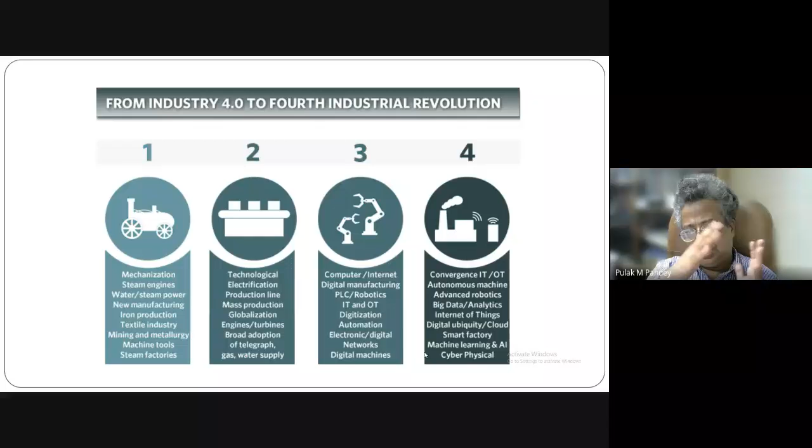The first industrial revolution was about mechanization. Mechanization means when the primitive machines which were there at that time, because this industrial revolution took place at the end of the 18th century, were used. If you have a machine, I'll say that a simple lever is also a machine. Now until you energize a machine, you cannot take work from it.

So from where did they get that energy? At that time, in order to drive or take work from those primitive machines, it was human muscular energy or cattle that were employed to drive those machines.

Then people kept on doing innovations. They developed some very primitive water turbines and derived energy from the flowing river. All those kinds of things people were trying. Materials were also developed at that time, and it was the time when iron ore was processed in a very nice manner, and people started developing steels, bringing a very nice, strong, tough material to society.

All these things together actually brought the first industrial revolution, but the key word here is mechanization, which took place because James Watt developed the steam engine. The steam engine development brought the first industrial revolution because all these primitive machines, improved due to development of iron, steel, mining and metallurgy technologies, were energized by steam power, and the human muscular energy or cattle-based systems were replaced by steam or water power.

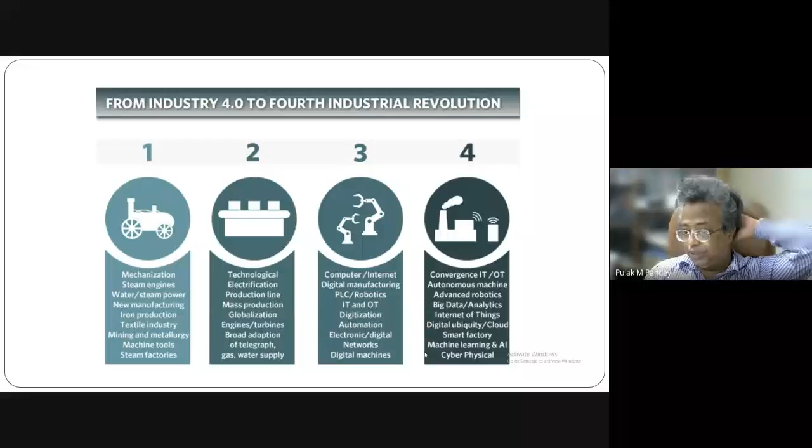All these things brought some sort of automation, so programmable logic controllers were developed. They brought automation in manufacturing, and bringing automation by controlling machines or machine tools with the aid of numerical control or microprocessors is termed Industry 3, or the third industrial revolution. This third industrial revolution is basically the substitution of human mental effort. In the first industrial revolution, human muscular energy was replaced by steam or water power, and in the third industrial revolution, it was mental effort that was substituted by the microprocessor, or numerical control, by bringing numerical control to manufacturing.

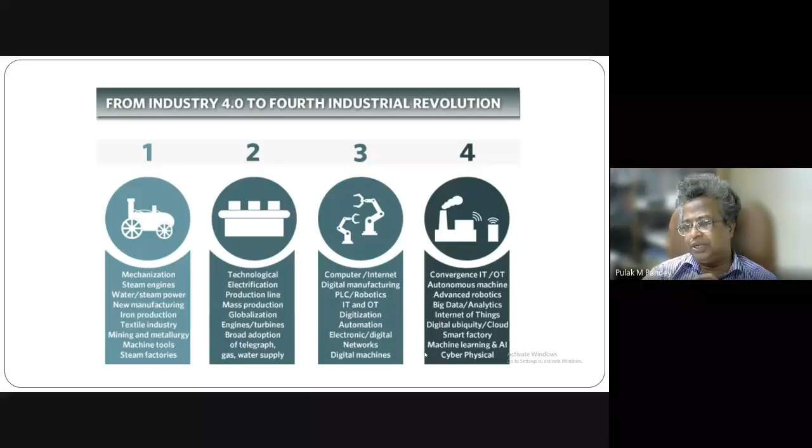Today we are talking about smart manufacturing, that is Industry 4.0, which is basically due to the convergence of information technology, wireless communication technology, and other related tools like big data analytics, Internet of Things, Internet of Services, cloud, smart factory, machine learning, and AI. All these constitute a cyber physical system. When manufacturing technology is enabled or assisted by information technology along with wireless communication technology to improve the manufacturing scenario, it is called Industry 4.0 or smart manufacturing. This is the most advanced concept we talk about today.

At the core, at the heart of the cyber physical system, we have huge digital information. Over the years, so many engineers and researchers have developed a lot of data, and if that data is made available in digital form - like you can visualize there are machining handbooks, handbooks related to additive manufacturing, grinding, casting technology - this is information, but it's not digital information. So this information has to be made available as digital information, and it should be present in the cloud.

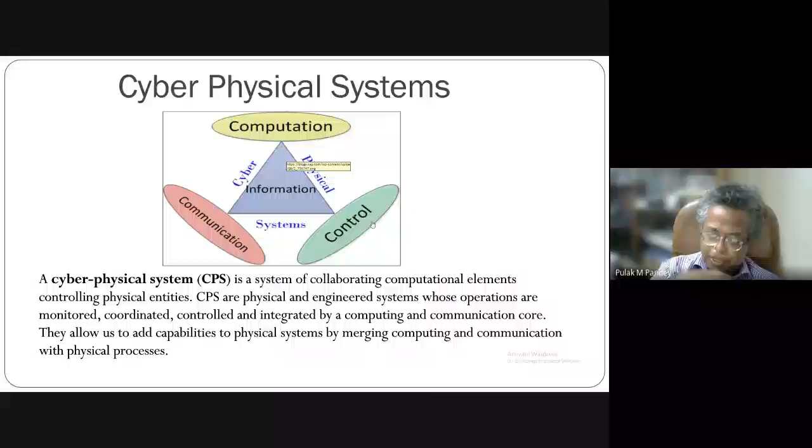Now, this schematic diagram just gives you a feel, but to actually achieve it, there are several technologies involved which are not only related to mechanical engineering, but also to electronics, information technology, computer science, mathematics, and many other branches of engineering together. So I'll show you those things in my forthcoming slides.

Now you might have also seen that if there are more models of a particular vehicle, like if you go to company A, it has car A1, A2, A3, A4, number of models, the way you have number of models for say Maruti car, you will find that there are different assembly lines dedicated to different models. You will hardly get a situation where two or three kinds of models of a car can be assembled or produced on a particular assembly line.

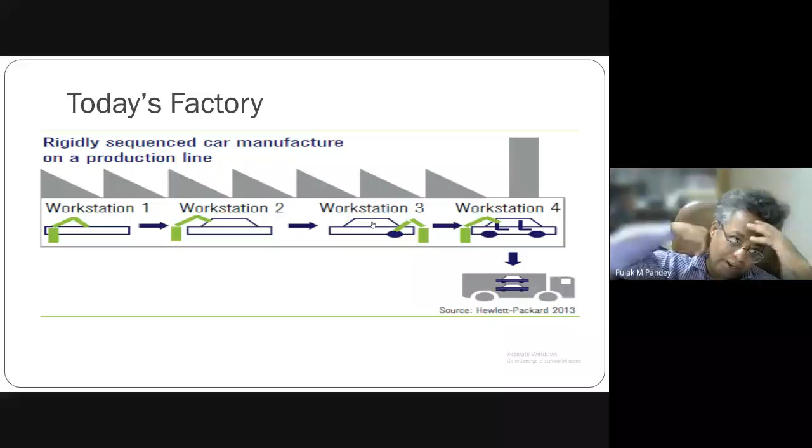So what you see is that it is a rigidly sequenced car manufacturing on a production line. Though this is a very nice way of manufacturing which actually emerged at the Industrial Revolution 2 time, and is also ongoing today with enhanced capabilities, still it has a limitation: it is rigidly sequenced and not flexible to the various variants of that car. So this is what today's production system is.

But what we are talking about in smart manufacturing is that this entire thing will be driven through data which is communicated to various workstations, which may be present at different premises in a company, or maybe at different locations physically, and they are all communicated the data through which they will operate. And these workstations also have capability - they are enabled with Industry 4.0 modules so that they can communicate with each other or one another.

And that's how you are able to achieve a fully decoupled, fully flexible, and highly integrated manufacturing system, which today we are calling smart manufacturing. So if you have this kind of manufacturing system, you will be able to handle different kinds of products - or more precisely, different models of a particular car can be done on this kind of integrated manufacturing system.

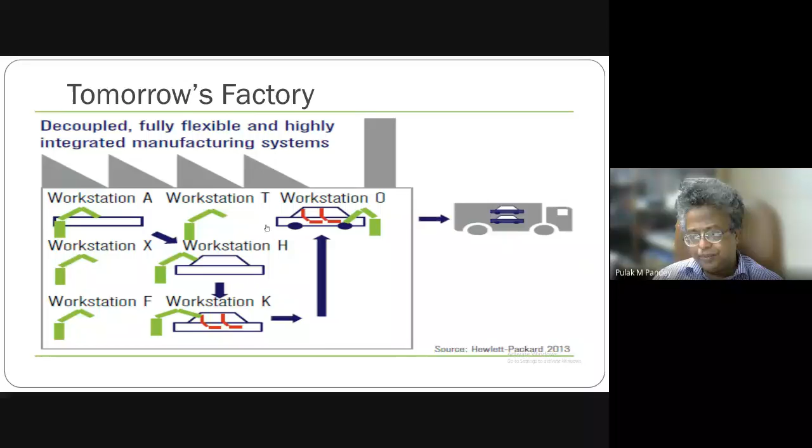There I could see that they are definitely able to modify this concept of today's factory. They are a little ahead, but have not reached up to this kind of concept. What they are able to do is, in one assembly line, they are able to assemble or produce more than one kind of car, provided there is a lot of similarity. So they have introduced some degree of flexibility in their assembly lines - they have moved forward towards bringing more flexibility in their production line, and they are not very rigid in their case.

So there are 6 typical design principles which you have to think about. One is called interoperability. Now this interoperability means the ability of cyber physical systems...

They are like workpiece carriers, assembly stations, and products. Humans and smart factories connect and communicate with each other via Internet of Things and Internet of Services. So this kind of property or capability, if you introduce in your manufacturing system, this is called interoperability. Then virtualization means this concept, like virtual simulation, virtual reality.

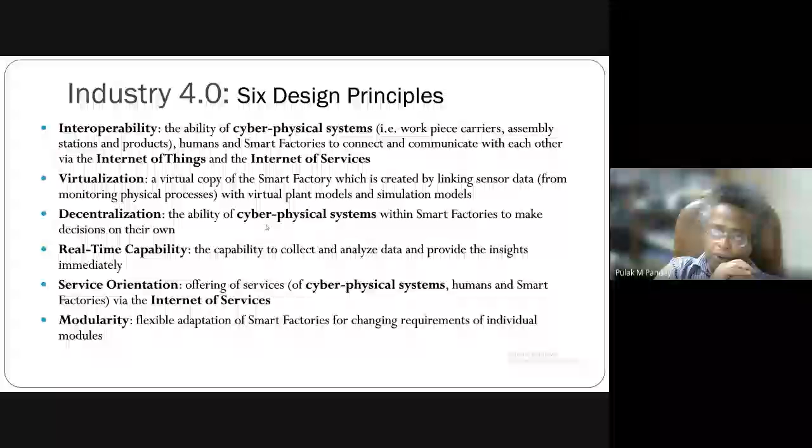So these smart assemblies, your smart components, can be produced by additive manufacturing. I will talk about those things in the second part of my presentation when I start talking about additive manufacturing or 3D printing. So these systems will let you know through the data being collected when the system is working, and the corrective action will be taken immediately in between - the capability to collect and analyze data and provide the insights immediately.

Then service orientation, of course, offering of services via Internet of Services.

And modularity. Modularity is the flexible adaptation of smart factories for changing requirements of individual modules. One example: you have a car with one kind of braking system, and you want to change the braking module to convert it to some sort of advanced disc brake kind of system. So your assembly line or manufacturing system should be able to flexibly adapt, and the changes can be done if there is a dynamic requirement by a customer.

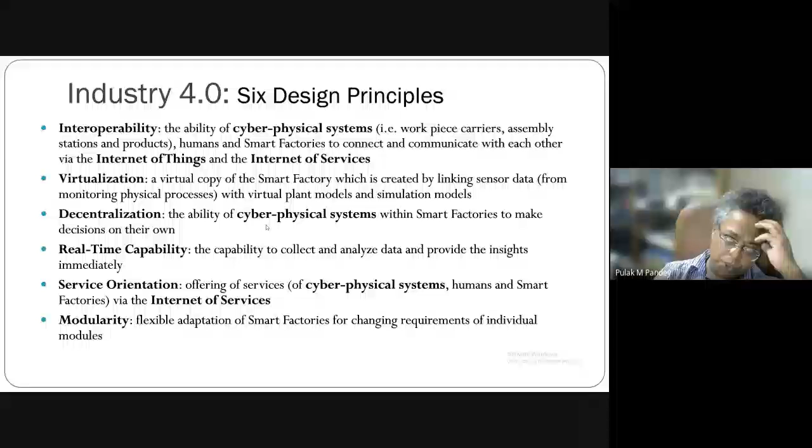So that kind of scenario we are talking about is related to smart manufacturing. I was saying one can achieve this smart manufacturing because you need to take several technologies together. It is not being done only by a mechanical engineer, it cannot be done only by an electronics engineer, it cannot be done only by information technologies, because there are various technologies which are likely to go together if you really want to implement Industry 4.0. And these technologies are like big data analytics, augmented reality, autonomous robotics, simulation.

Decentralization, that is horizontal and vertical system integration, industrial IoT, Internet of Things. And because most of the things you are doing are soft in nature, you are actually playing with digital data, you need to have security for that data. Cyber security becomes important.

And of course, at the end of the day, when you are able to decide everything and you want to convert your data into a hard product, a product, you need something to produce it, something which can fabricate it. So the technology which has been recommended is additive manufacturing.

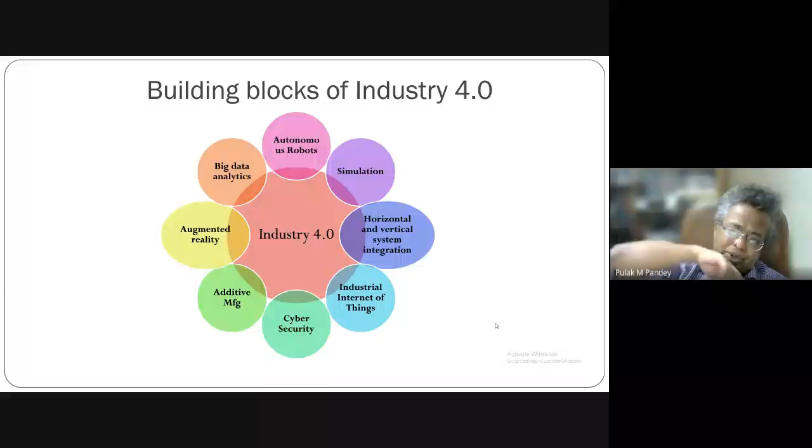And additive manufacturing is something which has been recommended as a tool for the smart manufacturing environment. So now in the next part of my presentation, I'm going to focus on additive manufacturing, and since you have already gone through a number of things about 3D printing, additive manufacturing means when we talk about 3D printing.

So what I should do is talk about certain important conceptual points, and then I'll take over to the very advanced systems.

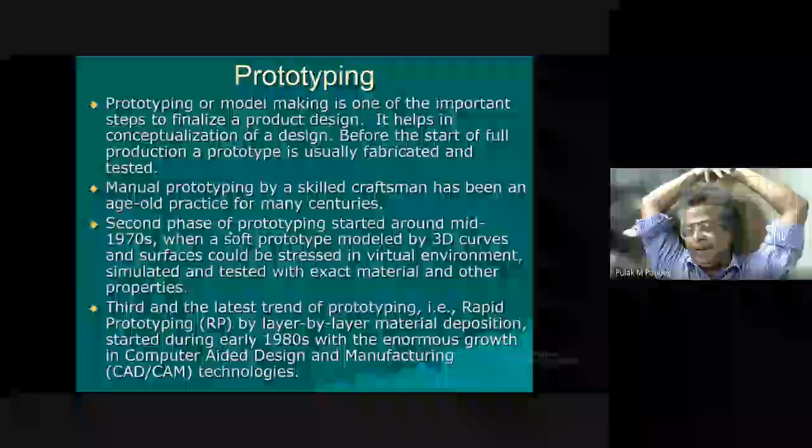This particular technology, quite advanced today, known as rapid manufacturing or additive manufacturing, was just a prototyping tool in the beginning. Earlier prototyping was with craftsmen, later it was virtual or soft prototyping, and the latest trend has been the layer by layer material deposition method, known as RP. It started with people thinking about it, and because of CAD, CAM, automation technologies together, they have taken it to this shape.

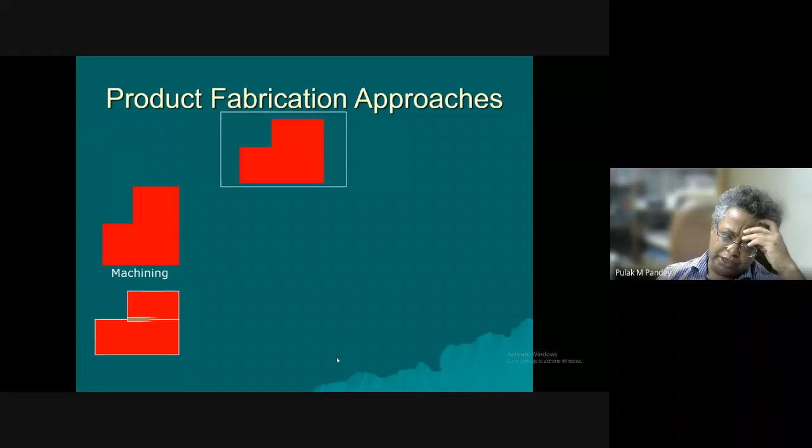The concept is very simple. We can remove material layer by layer to produce components. We can join two blocks. We can reform the material, known as forming. But here it is a bottom-up approach, meaning there's nothing in the beginning, and we are depositing material on a platform, keep on adding material from bottom to top, which is known as rapid prototyping.

You start doing with CAD modeling. So we make a CAD model, whatever I want to produce, then I'll do tessellation. Tessellation is piecewise - there are different surfaces in a valid solid, and those surfaces are approximated by small triangles, which is called a tessellated model.

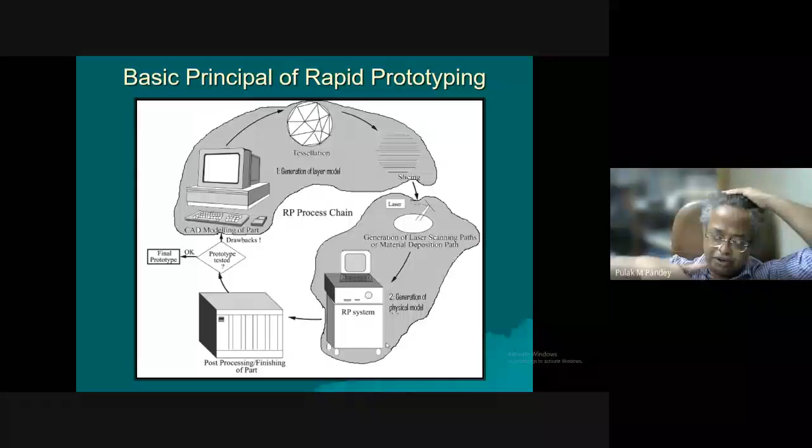This tessellated model is being sliced. Slicing is the intersection of horizontal planes from bottom to the top, and there are different algorithms for this. Once you have this sliced data, this data is fed into the RP system, and you have different technologies.

I believe you have gone through various technologies like FDM, maybe stereolithography, which are liquid based, solid based. Sometimes we use laser, sometimes we use UV lamp. Depending upon the technology for deposition, we have this 3D printer, either in the process software or outside, it does some other calculations.

If you go to openware softwares, freeware softwares for FDM, you have a number of, say, K slicer, this slicer, that slicer - so many softwares are there. So you do selection of some process parameters, selection of infill patterns, how to fill a layer. All those things you do, and then you feed the data to the system.

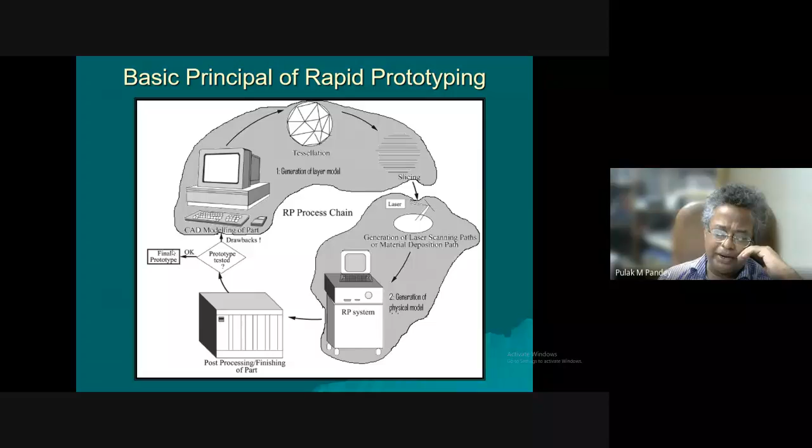The system deposits the material layer by layer, and you get the component. This component is post-processed, it is finished, or the supports are removed, and you get the prototype. If there are drawbacks in the prototype, you redo your CAD model, otherwise it is a final prototype. So this is how the thing works.

So if I have this virtual model of a component - this is the concept of tessellation, that a free-form surface, or any surface present on a solid model, is approximated like small triangles. Then you do slicing, and once you do the slicing, you basically get nested polygons.

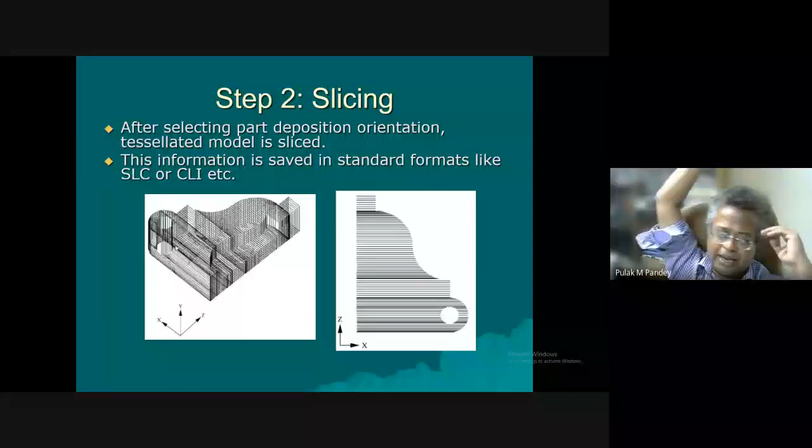These nested polygons are being written in standard formats like SLC or CLI. The way you have a STL format, we have SLC or CLI - SLC is related to slice, CLI is called common layer interface. So there are formats in which these nested polygons are being written.

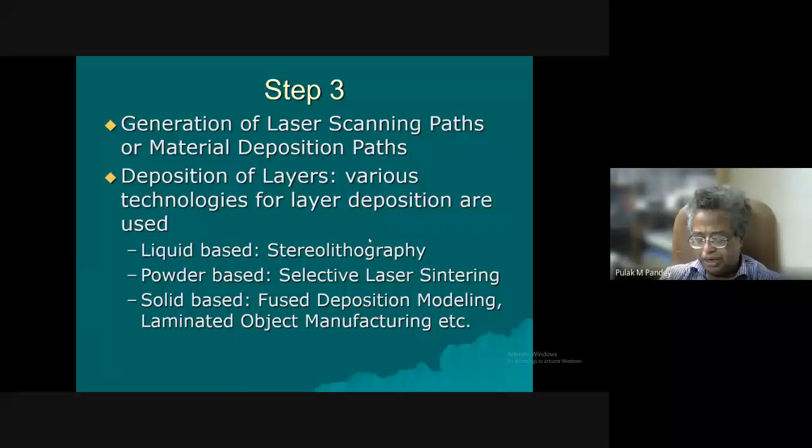These files are being used by the 3D printer in order to generate the laser scanning paths or the material deposition paths. We have different kinds of systems - liquid based systems, powder based systems, solid based systems. I'm not going to explain much about these things.

Then basically you have post processing. Once you get the component, it may not be fully cured. This situation generally you get in case of stereolithography.

In stereolithography, once it is done, you put it in an oven for post cure, and then removal of support structure. This removal is necessary because overhanging features require support structures during printing, which must be removed later. Then, because of the stepping effect, you have to do finishing by sanding, polishing, shot cleaning, painting, or sometimes, in the case of FDM or plastic components, acetone vapor treatment to improve surface quality.

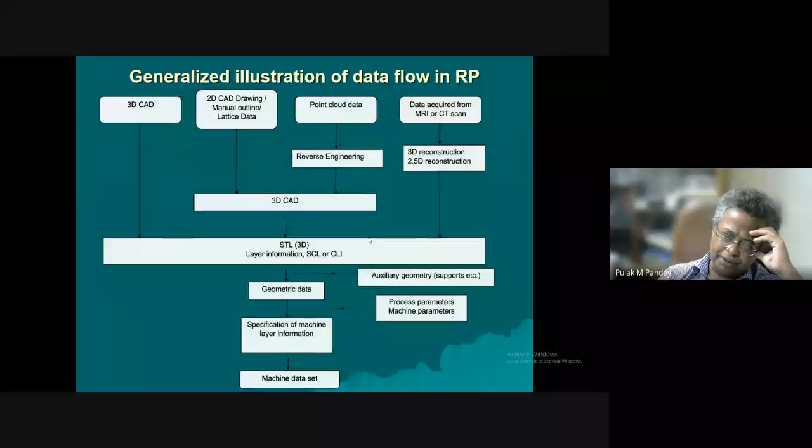Today we have different inputs - obviously 3D CAD and 2D CAD, you get STL and use a 3D printer. But there are two very interesting applications. One is reverse engineering, where we take scanned point cloud data and use it. Using reverse engineering software, we either develop a 3D CAD model or directly develop an STL file from the point cloud data, and operate a 3D printer to get the component.

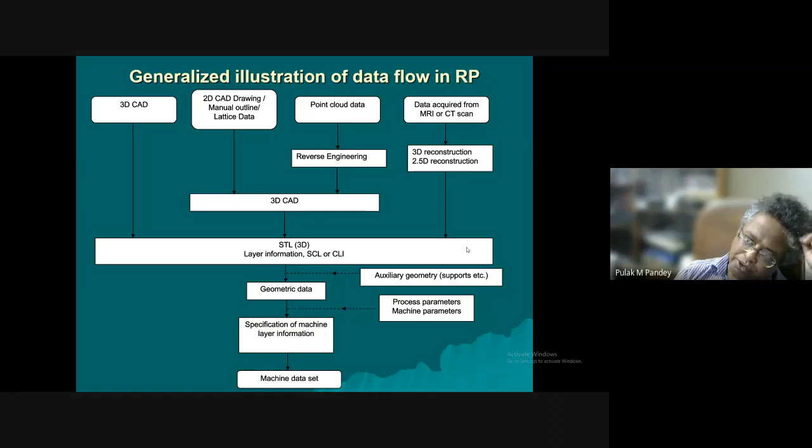For biomedical applications, which is very interesting in my view, because it shows the full capabilities of 3D printing - if you want to make an implant or a bone model for a particular patient, it is quite specific and customized. So you take MRI or CT scan data as input, using software like Mimics or Simpleware to reconstruct the model, get the STL file, and then use that data to create the component.

I've already explained that if you bring in RP as a product design tool, you can bring down the manufacturing lead time to a minimum, sometimes as small as 10%. This is what various projects have reported.

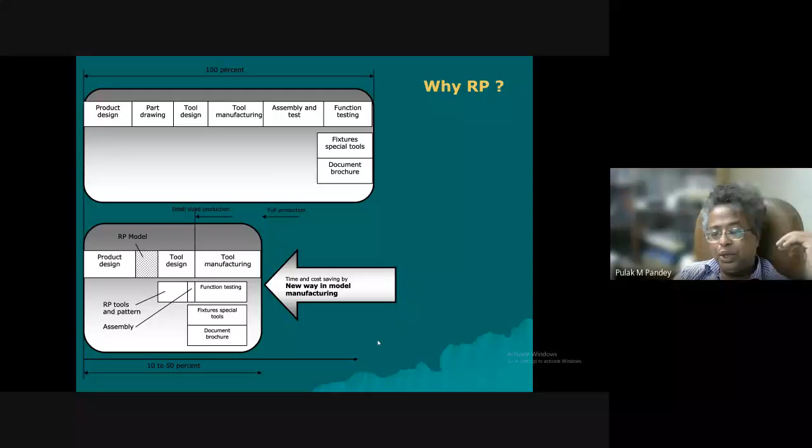If you use 3D printing technology in your industry for new product design and prototyping, you may be among the first few players launching a particular product in the market - they are the best profit makers. Later, when more players enter, there's a lot of competition and you cannot produce that much profit. So squeezing down the manufacturing lead time is very important.

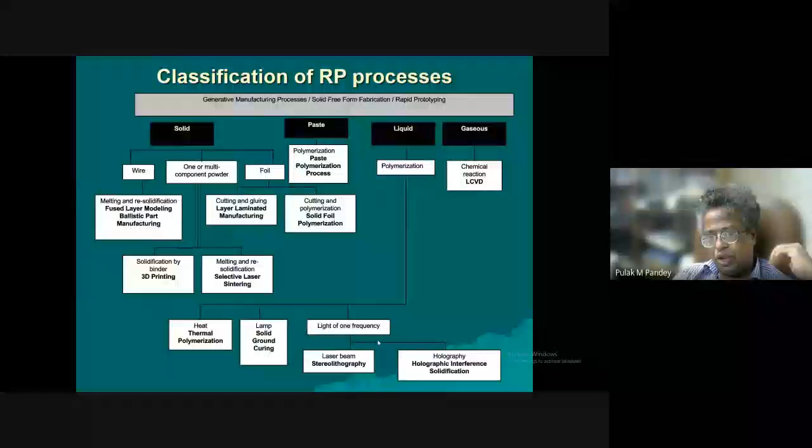As far as product development activity is concerned, it is a very important point of breakthrough which can bring laurels to your business. But there are definitely a number of barriers - I'll talk about that if time permits - which are not enabling us, which is the reason why Indian industry is not adapting this technology with open hearts.

So anyway, there is a classification... yeah. I'll call you back, I'm in a lecture, so I'll call you.

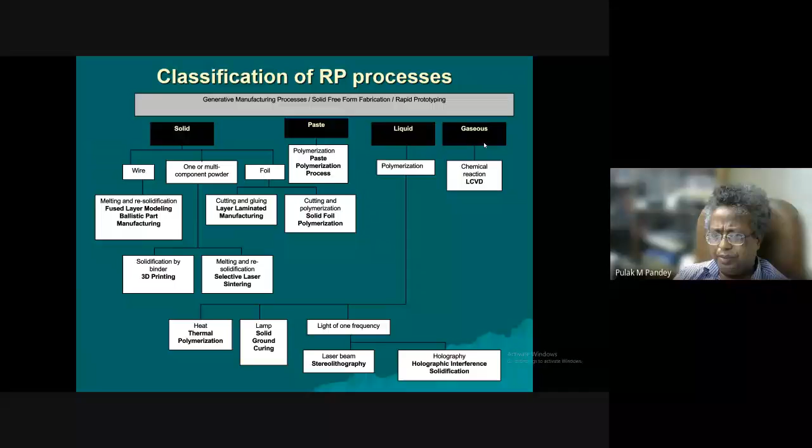This is called classification of AM. I believe you know there are solid-based processes, liquid-based processes, and you have stereolithography, FDM, and a number of other processes too.

Let me go back and show you this - stereolithography. From this technology only, the concept of rapid prototyping, or today what we call 3D printing, has started. In 1984, the first patent appeared for stereolithography.

Here the idea involves a very specific material called photosensitive monomer or polymer. In the beginning it is a monomer, and later when exposed to light of a certain wavelength, it becomes polymer and hardens. So the liquid resin being used is a photosensitive monomer acted upon by a laser beam. There's a photolytic reaction, because h-nu has to be greater than some nu-star, the frequency threshold, and wherever the laser spot goes, there's formation of a voxel and the material hardens.

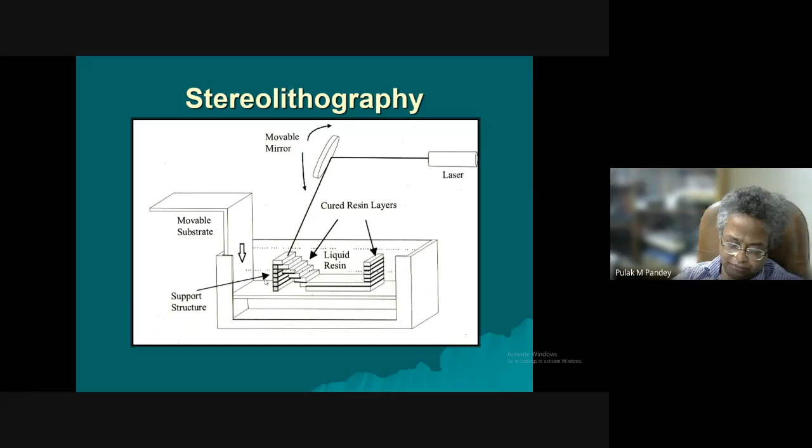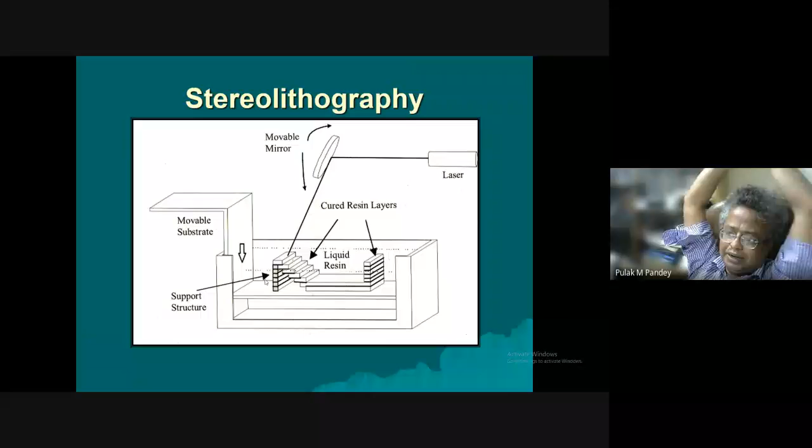This process is good because it has good resolution. Liquid can be deposited in very thin slices, so the accuracy, surface quality and resolution of the process is high. But the limitation is that very limited number of photosensitive materials are available.

So it's very much unlike the basic concept of powder metallurgy, where we study sintering. You should not get confused that there's any kind of application of pressure or compacting or then taking it to the furnace. No, it is a pressureless spreading of the powder, and when the laser spot comes, it gets melted at the periphery and connected to the neighboring particles. That's how the solid lump is formed.

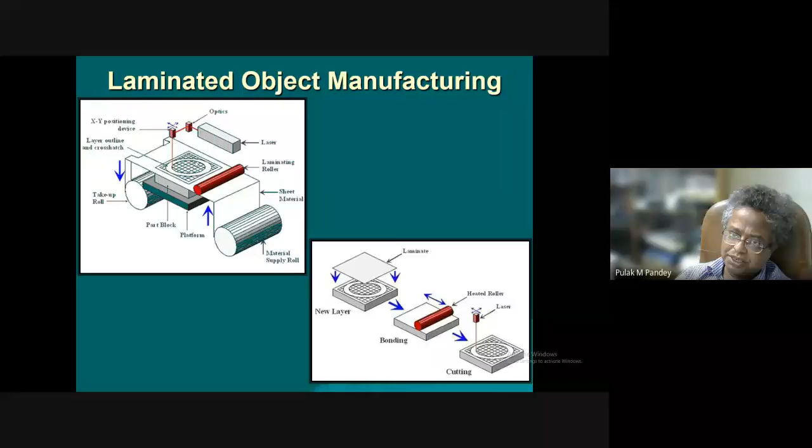LOM is something where the laser is used to cut the material. Here you have the sheet material which is stuck to the platform by a laminating roller, and you have a laser which cuts the material. This ring is something which is desired, and all other material is unwanted. So we are cutting it and taking it away.

Today we have advanced technology. There has been another concept of powder blow systems. The powder bed system is like the SLS system, and we call it SLM when we talk about metal. So here I can have polymer powder as well as metal powder.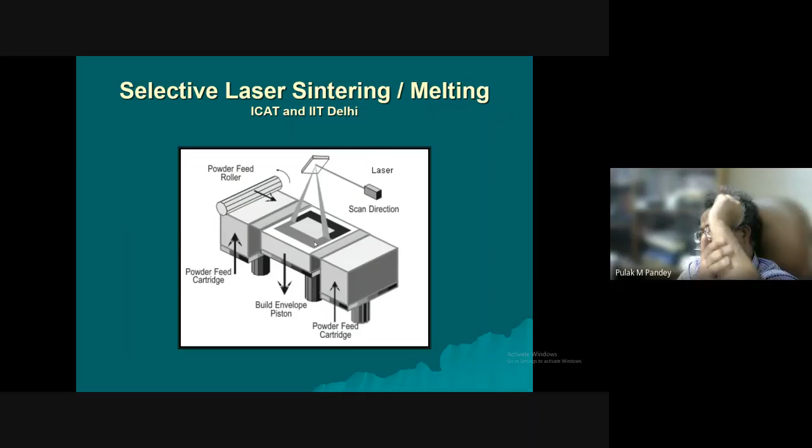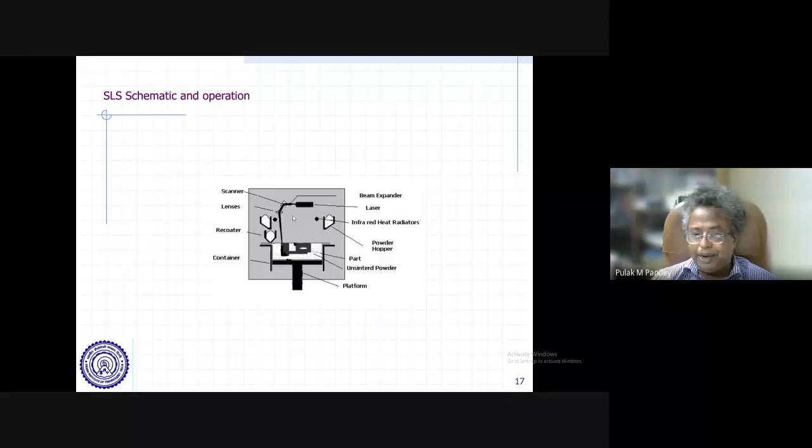If I am using polymer powder, I cannot go much higher; the temperature requirements are up to 300 maximum. If I have to use metals, it will depend on the kind of metal we are using, because in all SLM technologies we are even going for super alloy deposition. So we go up to 1400 degrees Celsius, maybe more sometimes. And you have to conduct this process in a proper environment, an inert environment, so that the material does not react.

Then another concept is the powder blowing system. The development started around 1996, with a number of parallel developments. One took place at Sandia National Laboratories, US, and another at Michigan University, and maybe some others. They called it LENS, laser engineered net shaping, and the Michigan people called it DMD, direct metal deposition.

Nowadays a new term has come, direct energy deposition. I do not know what this direct energy deposition is. You cannot deposit energy. If I see the terminology English-wise, direct energy deposition, I don't know how you can deposit energy, but maybe it is becoming very popular.

Then there's another term which has come, laser metal deposition. I don't know the English of it, but it is actually metal deposition and melting by laser. So the system is almost similar. You can see, I'll show you some videos too.

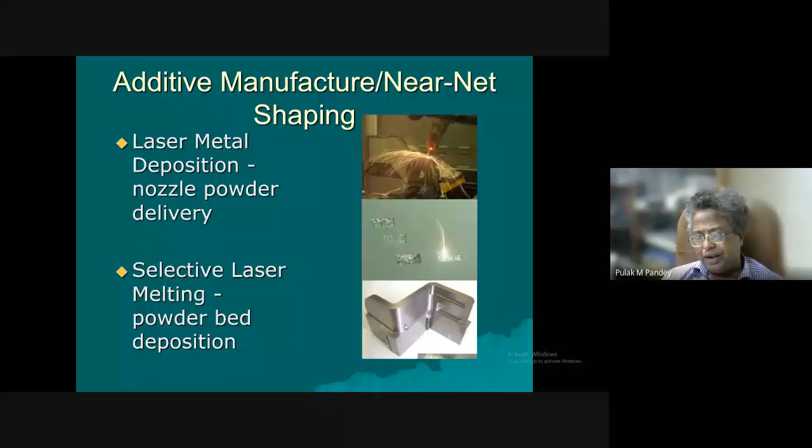Okay, now before moving to the applications, let me talk about some advanced additive manufacturing AM processes.

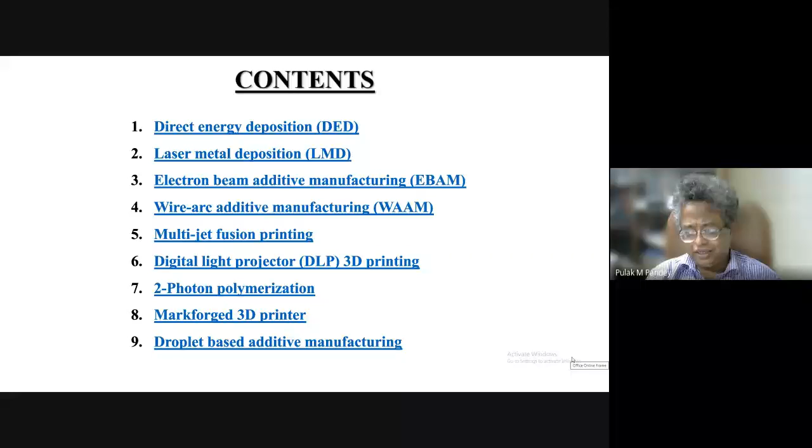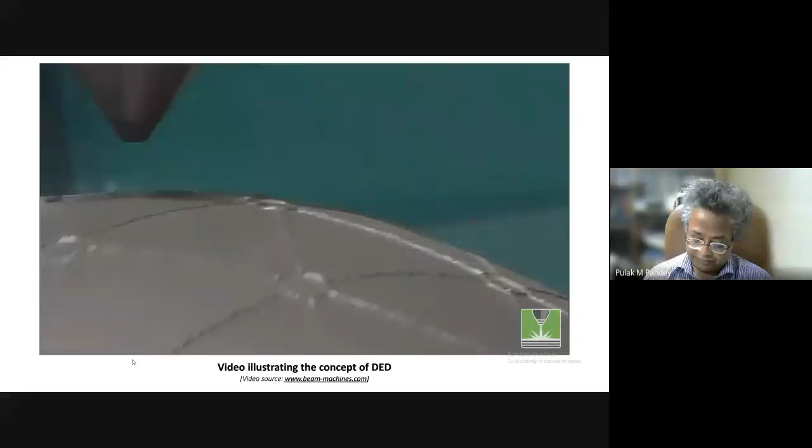Okay, so there's another video which is self-explanatory. There may be a different kind of torch. It is basically mounted on a robotic kind of system.

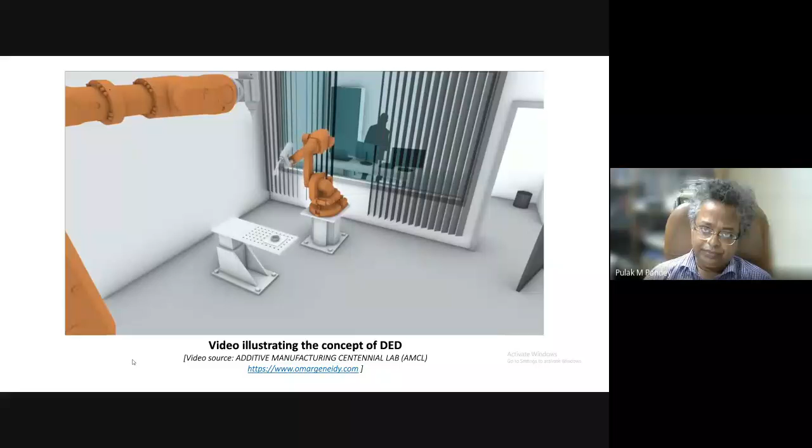I believe you would have already appreciated the process. So the pros, the advantages, are suitable for fabricating multi-gradient materials. You can create functionally graded materials from different passages. You can have different material powders with different flow rates, and continuously vary the material flow rate or composition, and that's how you can have a functionally graded material.

Then you can have a fast build and rapid material deposition. You can have very dense parts. Support structures are not needed because you are having multi-axis systems, and it can be used even for repairing of components.

Now, if you want to do repairing of the component, you need to have the CAD model of the original component. You will produce the CAD model of the worn component which needs repairing, and you will do the subtractive operation to get the geometry of the worn part. Considering that as a CAD model, you can deposit material using this kind of technology.

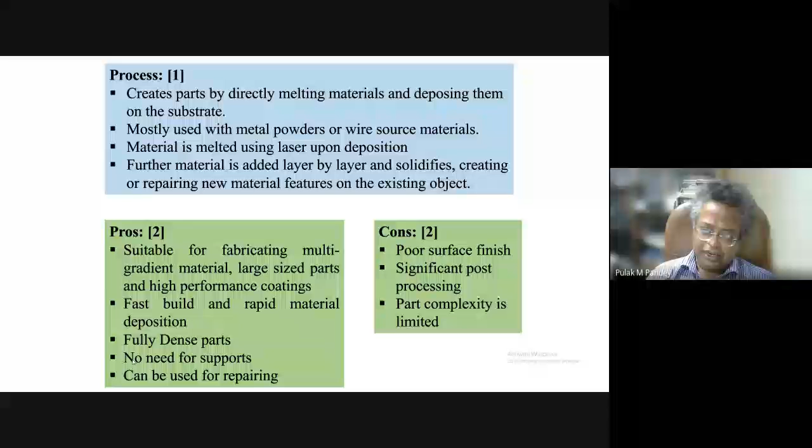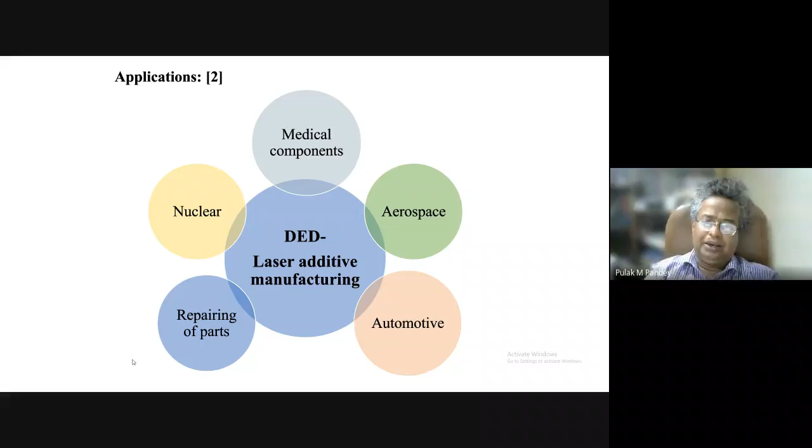So the limitations are that it has poor surface finish, and significant post-processing is needed. One big thing is that you need wire EDM, because you have to remove the complete component from the platform itself. Part complexity is limited, but it has different applications in different domains. There are focused applications, but you can see that in different domains you can have applications.

Okay, so then laser metal deposition is another variant. Similar concept. You can see only the design of the nozzle differs, and there are certain changes, and there may be some changes not known to anybody because they're in the controls. But from the outside, the concept looks similar.

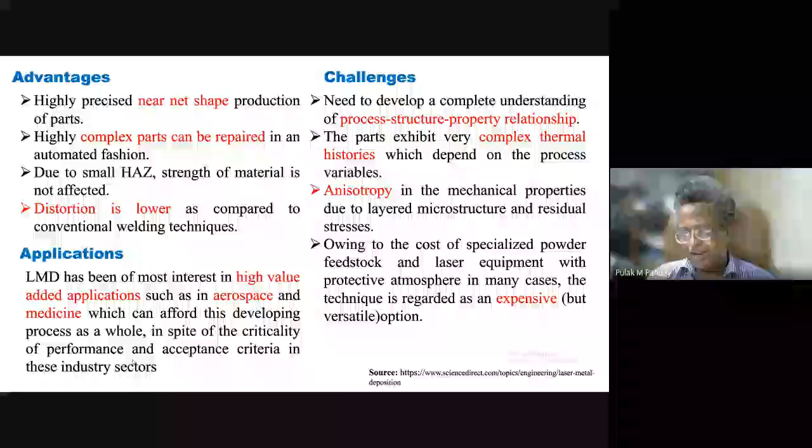Here also the challenges are that you have very complex thermal histories, and the process-structure-property relationship is still not established. Anisotropy is there in the mechanical properties because of the layers and because of the porosities, and it is an expensive system.

Distortion is less, definitely. Then people have also used electron beam in place of laser beam, so there are two variants. You have a powder bed system, so everything is similar except that you are having an electron beam of high power, around 3 kilowatt, instead of laser, doing everything similar, but able to make components on powder bed.

The advantage here is it's a vacuum process. Not advantage, it is a vacuum process, and of course it becomes costlier. But because of this, it leads to elimination of impurities and excellent mechanical material properties. Another version may be the wire-based version, where instead of powder you have a wire feeder and an electron beam, they interact, and you are able to deposit the material.

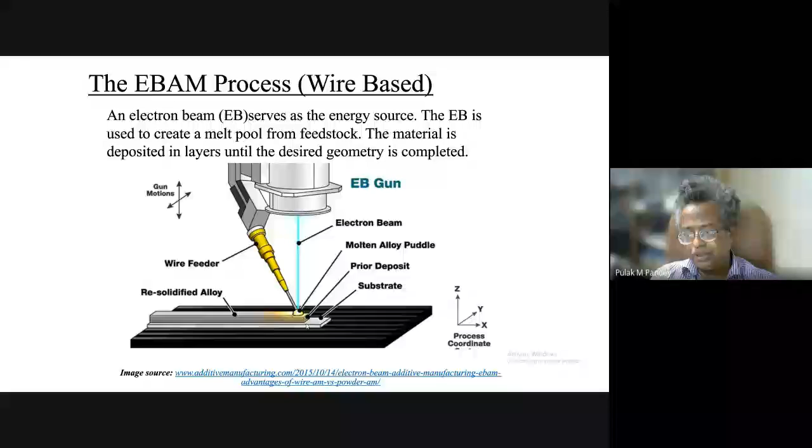So you have different advantages and limitations, and you can see the various applications in different fields for this particular process. Then we have wire arc additive manufacturing, using welding. Of course, MIG welding has been used to develop this process. So you can see the process video.

Uses an arc welding process to 3D print metal parts, and the process is controlled by a robotic arm.

This is another video.

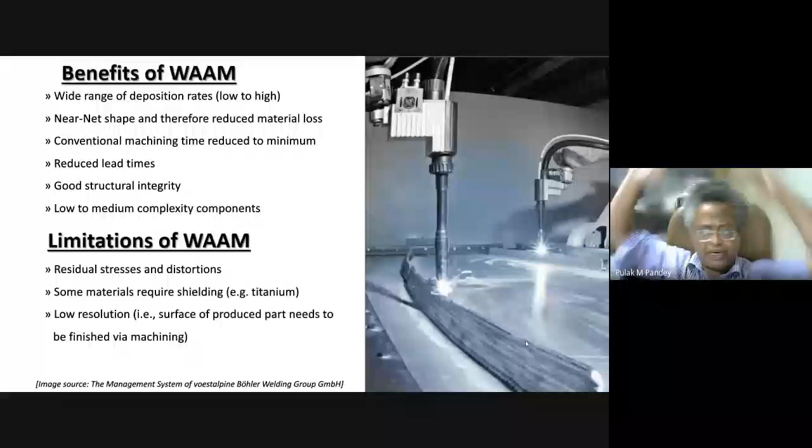Now there are a number of benefits of WAAM. It has a large range of deposition, near net shape and therefore reduced material loss, fast process, good structural integrity, but the surface quality and residual stresses are high. For very reactive materials, you need shielding gases.

It is a low resolution process. You can see the walls which have been produced, so you can appreciate the kind of finishing and the kind of distortions which are being achieved.

So I don't get money to do all this thing, correct? I'm a very economical professor.

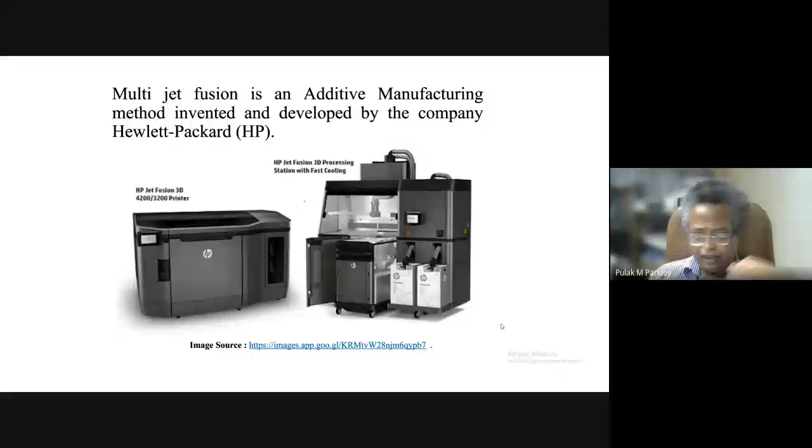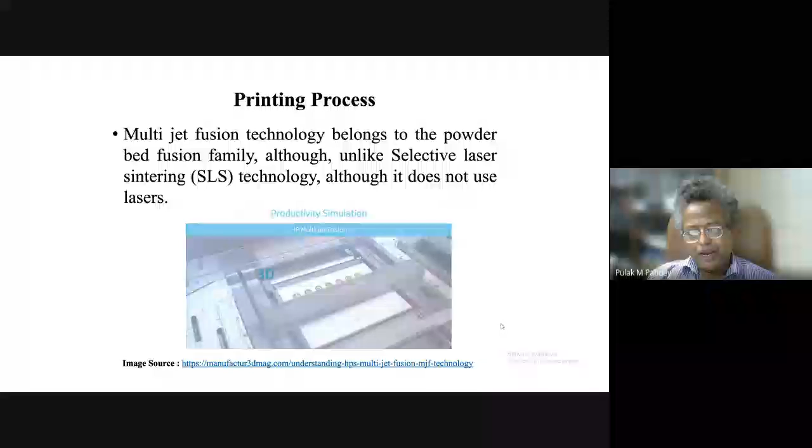Here basically you are spreading the powder like a powder bed, and you are using two kinds of chemicals. One is called a detailing agent and one is called a fusing agent, to make the component where you want it to be hardened and become sintered, and then you are at once exposing the UV light. So in one go it goes.

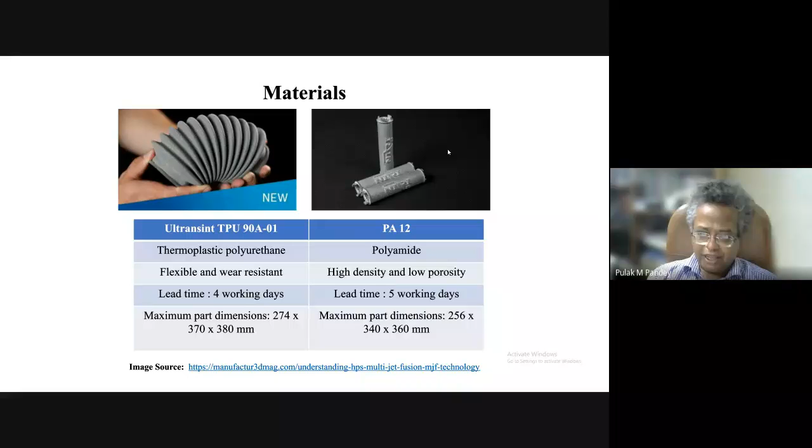That's why you are able to make dense components, and you can see there are different patented materials they have. One patented material lets you create very flexible components, that is polyurethane, and you can make strong components from polyamide.

I have taken the material. Then another process.

Which I have come across, talking about FDP like you only, then I could come to know. So I read about it and made the things.

So this is digital light processing. Very much similar to stereolithography, but instead of projecting the image of an entire layer simultaneously, regardless of the number of parts, here instead of laser we are using light.

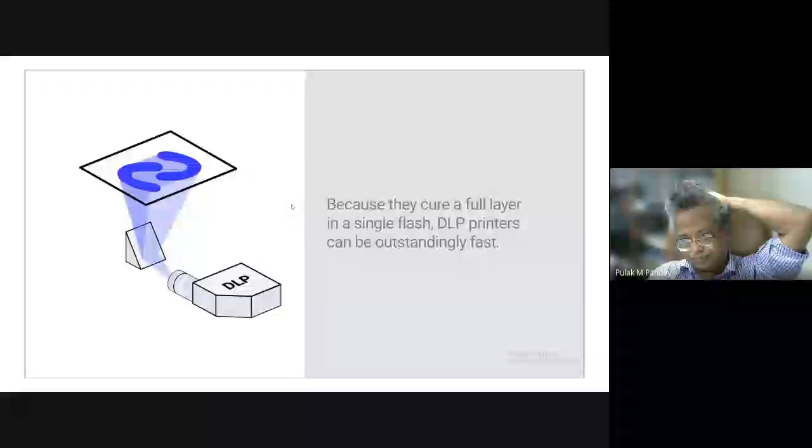Flash, DLP printers can be outstandingly fast, very reliable with low complexity and minimal issues.

So what happens here is that in case of stereolithography, you are using a laser spot to move, but here at once you are exposing the things like this, and the entire layer is exposed in one go.

And basically you are having some digital system which I'll show you. It's like an LCD. So certain parts become opaque and certain parts are transparent, so the light passes through it, and you are projecting this kind of film, UV light on this, and the resin cures. So that is called DLP.

So in SLA you get basically a point, but here you are exposing the entire layer, and that's why the DLP process becomes faster if the component has larger sections. But if the component has small sections and very intricate details, it is stereolithography that may give you better results. So these are the different geometrical situations.

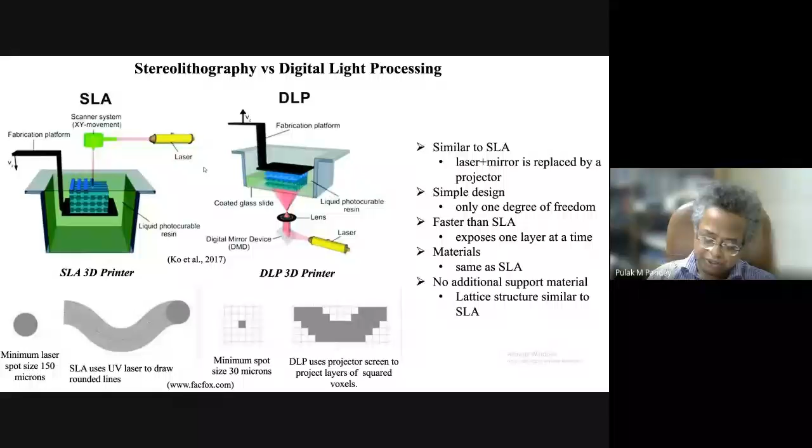And then we have the 2-photon polymerization process. This is another important process where we are again using polymer, specifically photopolymer. Instead of having a parallel laser beam, we use a conical laser here, and that's why the energy gets concentrated the way it has been shown here.

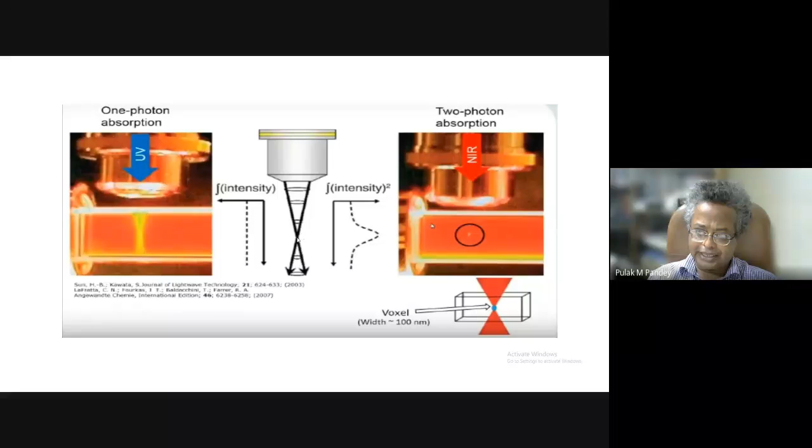So voxel here, the polymerization takes place and you are able to deposit a voxel, and that's why the size is very small. You can control the size by laser intensity, by cone angle, or by focusing in a different way.

So in this process, the small volume that is being deposited gives very high resolution, approximately 100 nanometers, and it is complementary to 2-photon microscopy process. Online process observation is of course there, and the advantage here is that this 100 nanometer size is much smaller than biological tissues and cells.

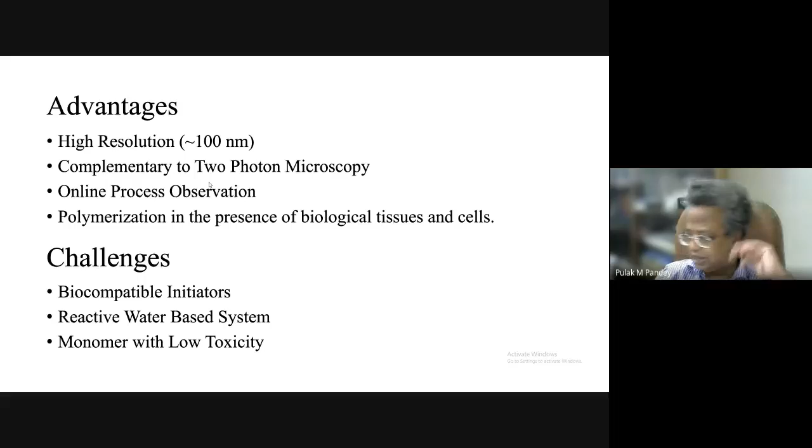That's why you can do the polymerization, or the 3D printing, even in the presence of biological tissues. So it is a very important process for tissue engineering applications, at the micro level. But you need biocompatible initiators and monomers with low toxicity.

So this is all about that. Then I'll talk about the Markforged 3D printer, which is for deposition of, I must say, composite material. This printer is actually based on the concept of FDM, that is fused filament fabrication. If you see this fused filament fabrication, you will actually enjoy this Markforged 3D printer. So let us see this printer also.

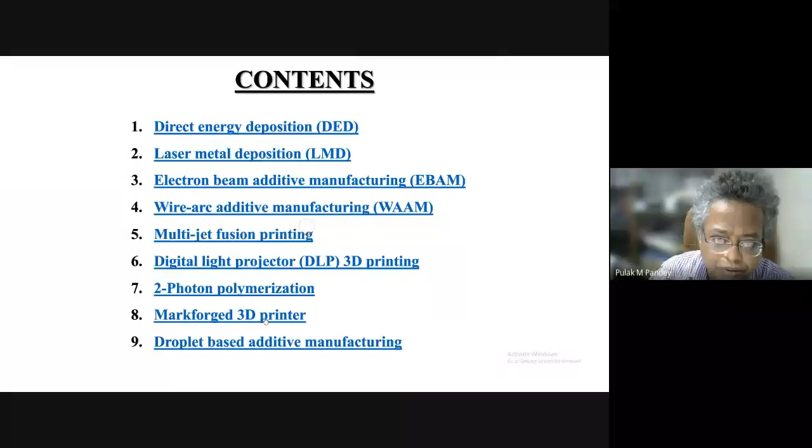Okay, so here basically there are two ways you can do it. You can have alternate carbon fiber spool and nylon spool, and using the concept of FDM, these are the two spools, very fine wires are there. It's unlike FDM, where we have around 1mm diameter or maybe a little lesser diameter wire, and we are able to deposit it the way it has been shown here alternatively.

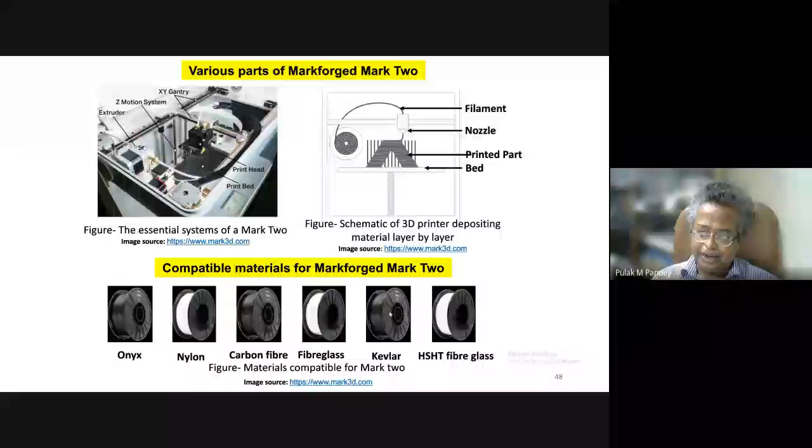Then we also have a material they supply called Onyx. Here chopped carbon fiber is used. So it is an Onyx material, and you have carbon fiber, then glass fiber, Kevlar fiber. You are able to actually deposit the material alternatively, or sometimes with chopped fiber material, and you are able to deposit a variety of composites. But the principle is basically fused filament fabrication.

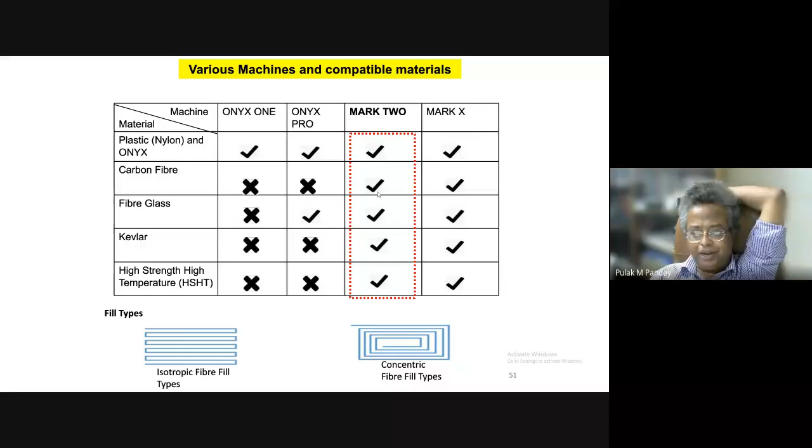So you can make different components which can be used for real-time applications. You can see there's a shock absorber which has been developed by Onyx material. Then we have a carburetor which has been developed by this composite material, and this is a jaw for holding the workpiece during machining. So they have all been done using this kind of composite material.

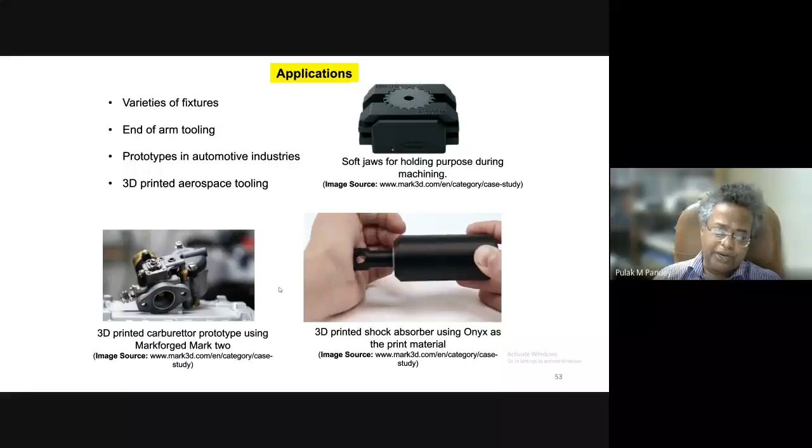So very interesting, we have this printer with us. I could not do any research work till now with these things.

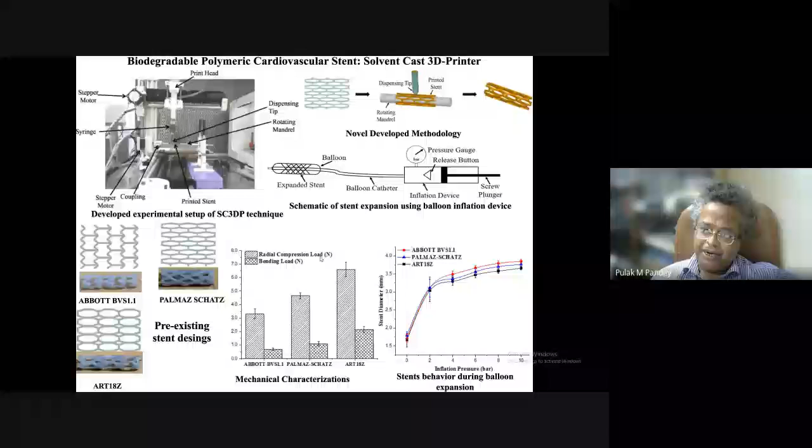And then when you do angioplasty, you do ballooning. So we have done the testing for ballooning. We did the radial compression bending test as per the standards for these particular stents, and we did the ballooning test also, and the biological testing also. So this is the results of biological testing, and we did the degradation test.

So what happens is these metallic stents, they are always present, but they will degrade after few years. That's the idea. So we were in touch with some doctors also in AIIMS. This concept was developed, and this boy has defended his thesis with very nice comments, and this is wonderful work. We had copyright of various algorithms we have developed. We have 2 patents on this particular thing which we have developed at IIT Delhi.

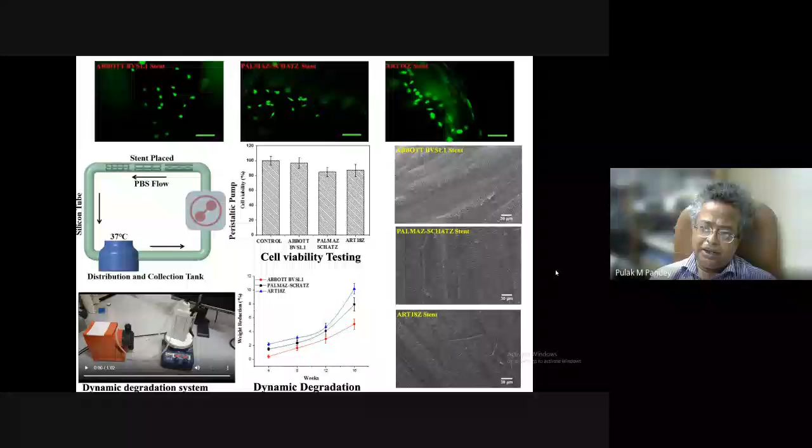So with ordinary DC supply, you get very large grain size, but once we used nano pulse DC, we get nano particles in the structure. So now we can proudly say that I can deposit a micro component, and I can ensure that every grain present in that micro component is a nano grain. This is an entirely different kind of work which we have done at IIT Delhi.

This is another very recent work, and every work has a patent. This is 1 or 2 years old. We have developed a biodegradable pure iron implant, because now again the trend is biodegradation. So if you are using pure iron as an implant material, it has a stress shielding problem, and at the same time its degradation rate is very low.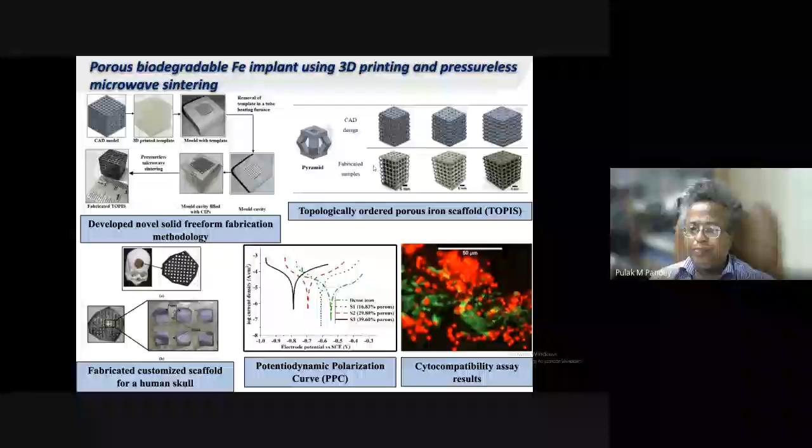So we have tried to improve its degradation rate and reduce the problem of stress shielding. We have developed our own system. You can see the kind of accuracy we have got in our microwave sintering along with this stereolithography. Even with metal deposition systems which are recent, you cannot get the kind of accuracy and surface quality which we have achieved from the commercial systems available today.

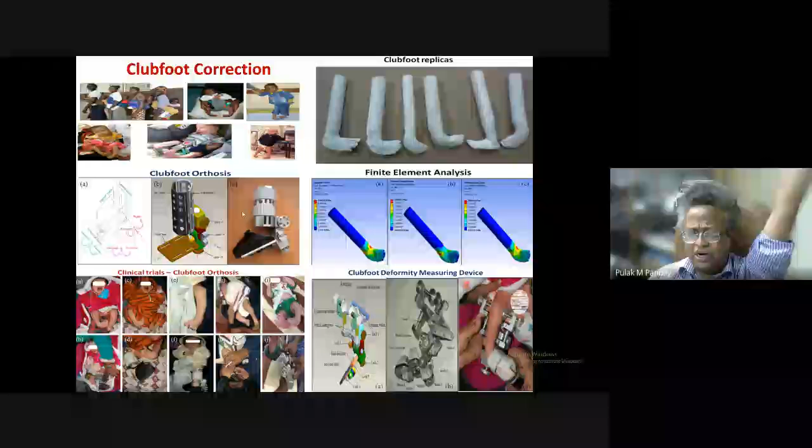Then again, a wonderful piece of research work where we developed this clubfoot orthosis. These are the silicon rubber clubfoots of the babies which we could contact at Delhi and Chandigarh region, and we could basically develop there. This work is a little older, completed I think in 2013 or 14. This is the kind of orthosis we developed, and we did clinical trials also at PGI Chandigarh. This is a measuring device for clubfoot, which we have developed at our place.

So now let me go back to this particular piece for which you have written the topic. Let me explain the concept of ultrasonic bone drilling. Of course, I'll not say that there's a direct involvement of 3D printing work here, but the entire knowledge which we keep acquiring in this particular field has actually helped us.

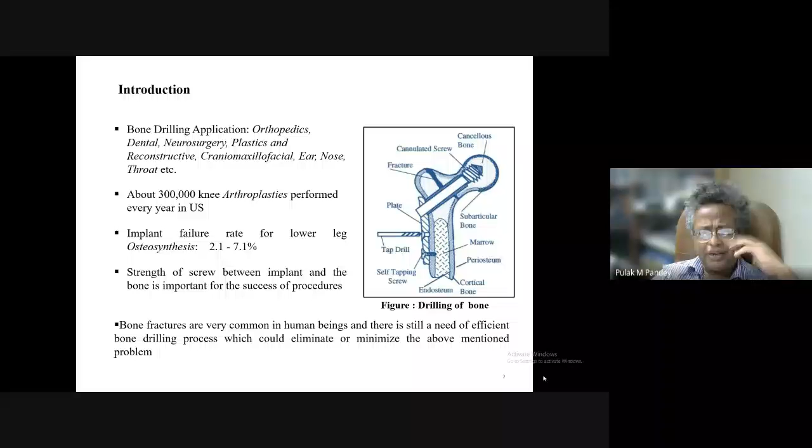So we have developed a bone drill prototype. This is all general introduction. So basically, when you try to drill a hole, you get heat generation and there are cutting forces.

So the problem is that hole inaccuracy is there, micro cracks are there, and bone may break, and there's thermal necrosis—because of the temperature rise, the tissues basically burn. So this whole problem is called osteonecrosis.

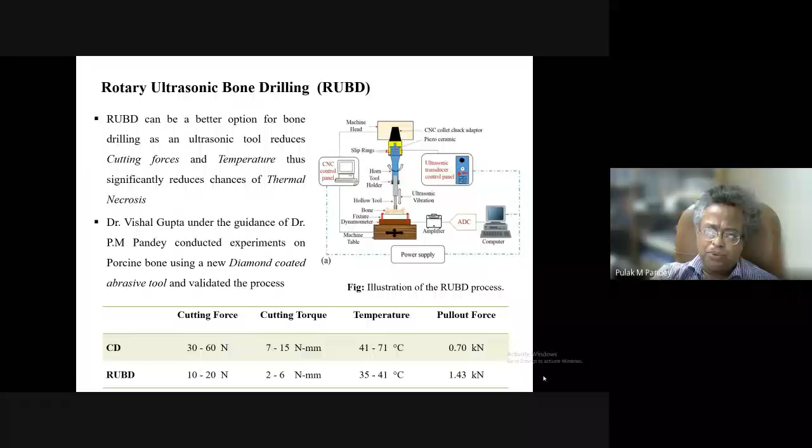So we have developed our own process where we have developed a rotary ultrasonic bone drilling system. We have a patent of this machine also. So here is an ultrasonic vibration and there's a tool. Frankly speaking, this tool is something which is very novel. Let's have a look on this.

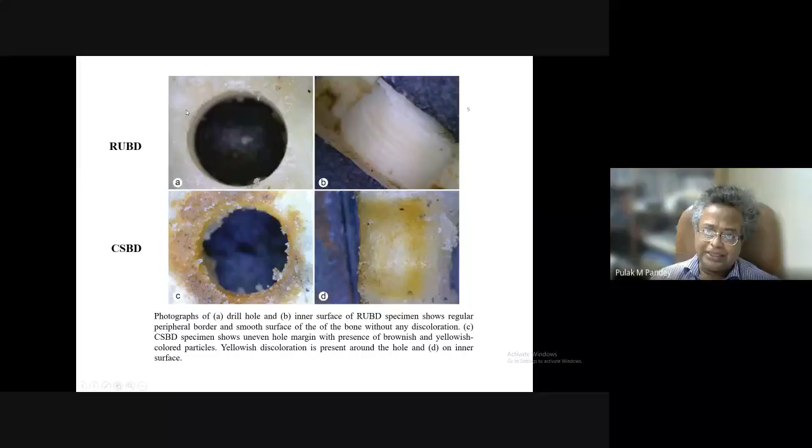So this is the whole geometry, this is porcine bone results. If you do it with conventional surgical bone drilling, which doctors are using nowadays in operation theaters, this is how the hole looks like, and you can see all this burning of the tissues. But once we do it with our process, you can see the geometry and there's no burning at all, and there are no micro cracks if you are doing it with lower feed rate and proper process parameters.

But in case of RUBD, there's no evidence of having any cracks, or if at very high process parameters there may be cracks, they are very little.

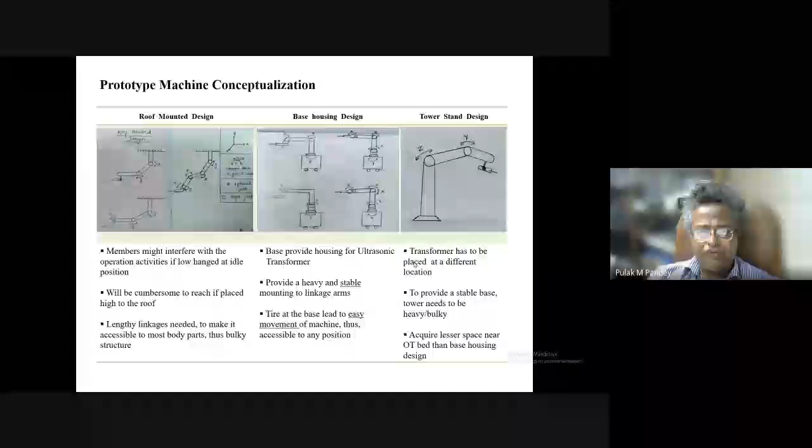Then later on, with this concept, we have developed a prototype machine for this purpose. We kept on doing so many things—these are the intermediate steps. But finally, a machine like this has been developed, and it is available in our lab. The final work slides I don't have right now.

So this is how the tool was developed, and this is the tool actually. This is the major innovation on our part, that we could develop this design of the tool which actually vibrates. Here it's not just the geometry, it is actually a horn—a horn of the ultrasonic system. So you have to do the tuning very properly.

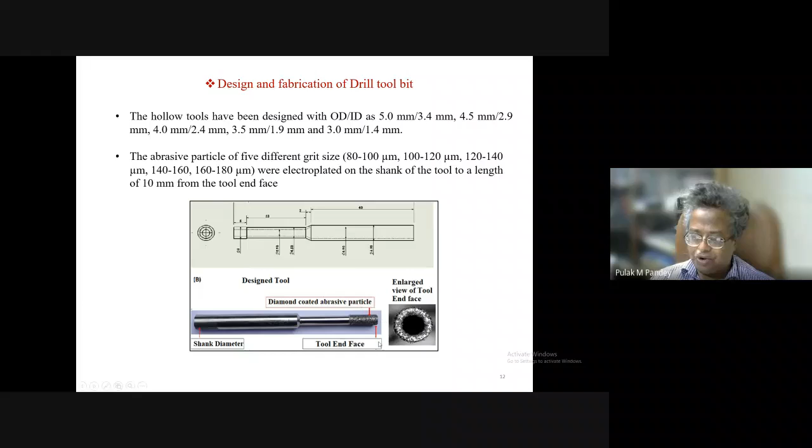The dimensions, the materials, and having this coating of diamond abrasives by electroplating, this all has to be worked out—it is actually a design problem, frankly speaking. So there's an innovation involved and you have to design it mathematically.

So this is our final tool, and this is all developmental stage slides. This is how we have taken the ethical clearance from IIT Delhi and AIIMS, and finally we could develop this machine. The prototype is available and ready, and we are looking for certain companies who can do the commercialization of the system.

This particular work was sponsored by Srishti BIRAC, and I do acknowledge their funding which we received there, on the name of Dr. Vishal Gupta, who worked on it in the beginning, and later on Ravinder Singh has taken this work forward.